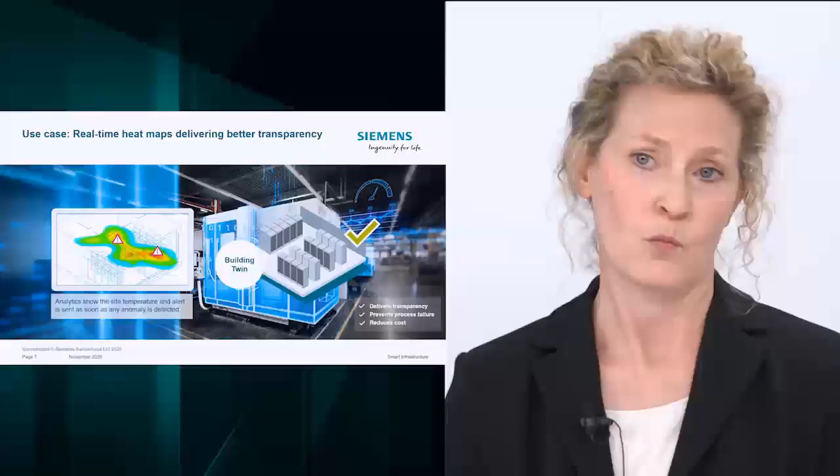Another example is from a data center. Overheating of racks is a very critical issue in data centers, and the earlier this overheating is detected, the more damage can be prevented.

If we provide real-time heat maps where the hotspots can immediately be detected, the people in charge are enabled to react immediately. By this visualization in a heat map, they can not only see the hotspots immediately, but they can also see by this temperature gradient if the surrounding areas are affected too.

Surely I can tell you many more use cases, but the point I would like to make here is that visualization is a key element that our customers are asking for. This is exactly what we did together with Bentley in a hackathon.

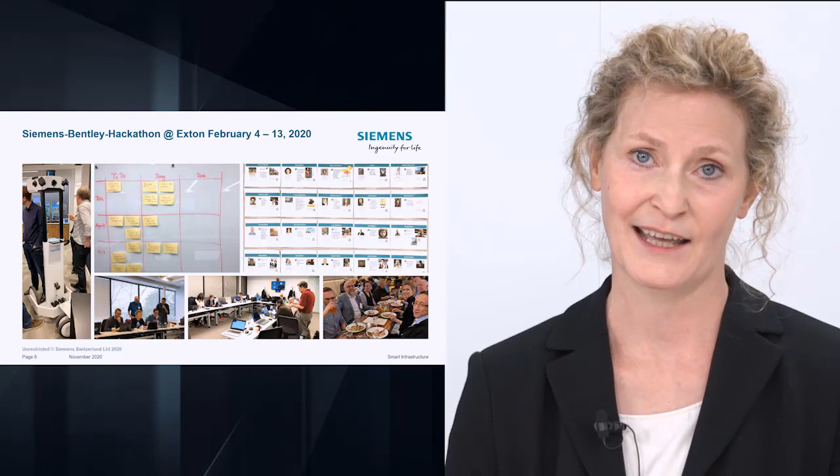We explored how we could bring an iModel together with IoT data and how we can provide an outstanding visualization. We took the iModel to deliver the structural data, and we brought it together with IoT data from various kinds of sensors. As you can see on the images, it was quite an intense week and we had a lot of hard work.

But back to what we actually did. We started with BIM data of one of our customers' buildings, located in Vienna, Austria. He delivered 4 different Revit models to us.

In the first step, we used the iTwin synchronizer, the so-called bridge, to populate an iModel with this data. In the second step, we used iModel.js to extract building structure data from the iModel into our knowledge graph database. On the other side, the connected devices in the building deliver data to the time series database.

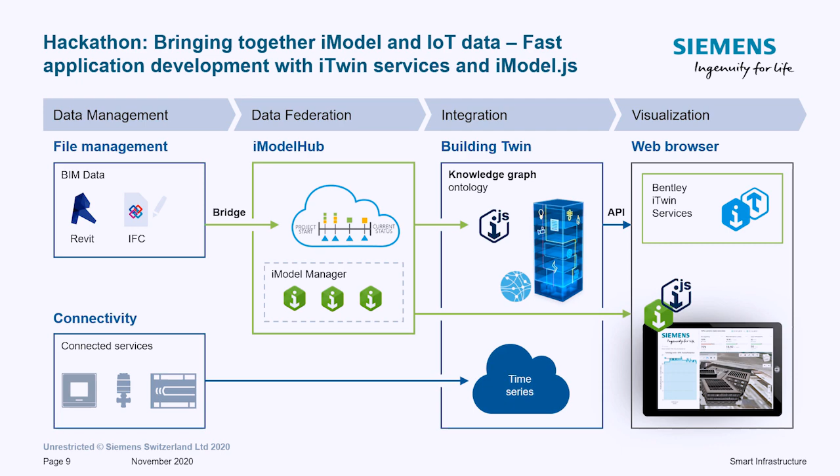These time series data can also be accessed through our building twin API. As the Revit model has unique IDs, mapping is possible with the time series data. In the hackathon, we then used different features from the iModel.js SDK and created a web application that can visualize the IoT data in the 3D model of that building.

Let's now have a look how we realized it. Sandro, the stage is yours. Awesome, thanks Berit for the great introduction and the overview.

I have just one slide left before the presentation, so please bear with me. What I want to discuss in this slide is what feature was provided from where. From Bentley we used the Synchronizer portal, the iModel hub, and also the iModel.js SDK to generate our hackathon application.

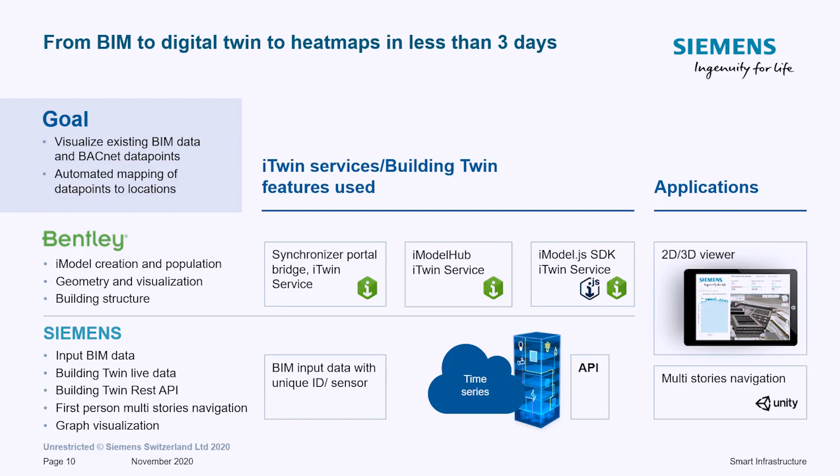From Siemens we provided the BIM data, the 4 different Revit models, also the building twin API and its data, and 2 components developed prior to and after the hackathon: the multi-story navigation and also the graph visualization.

What glues everything together is one unique ID in the physical programming of the building, and this same ID is at the same data point in our Revit models.

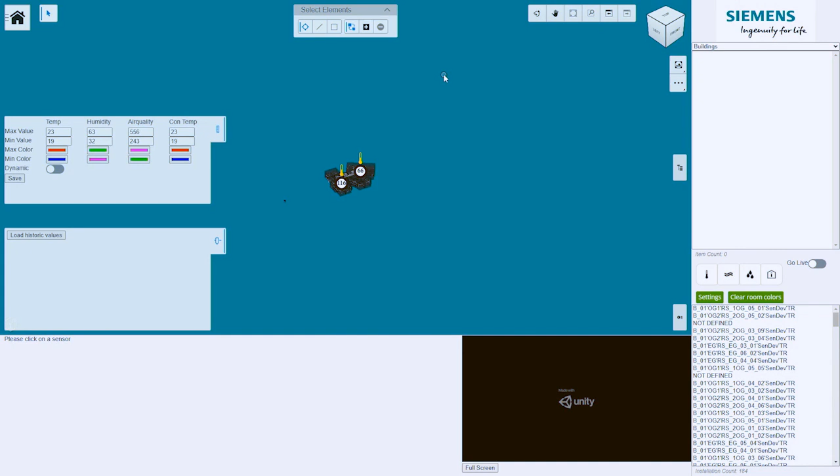With the stage now set, let's move to our demonstration. I want to first explain where this application is running. It's running on my business laptop without any dedicated graphic card, just to bear in mind the performance of what you will see.

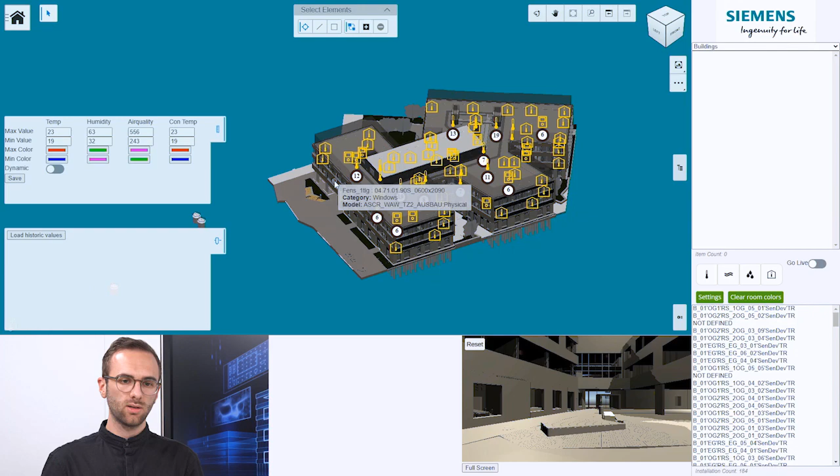This hackathon application was born out of the 9-zone example, but we did change some things. We added 2 stage panels—a functionality from iModel.js. The right-hand side is the building browser stage panel, and the lower stage panel is the sensor detail.

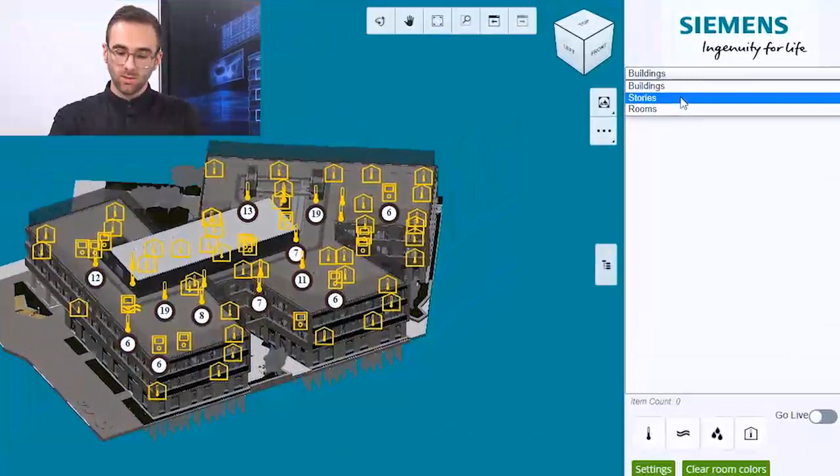I will first explain what the building browser is doing. It shows the different stories and rooms of a given building. If I click on a story, you will see each level of this building. What is interesting is the item count here shows 8 stories, but the building has only 5.

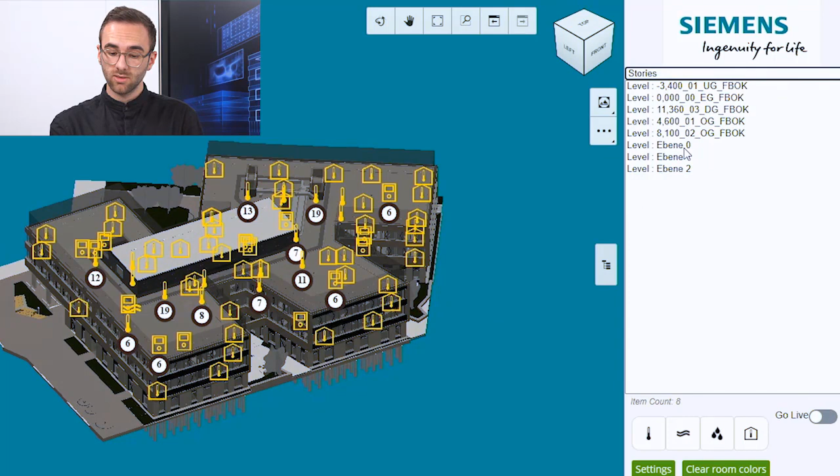This is because iModel.js aggregates everything called a floor or a story into one data table, and this is the result of it. But if we click on a certain story, you will see that our viewer creates two clipping planes, slicing the model into different stories.

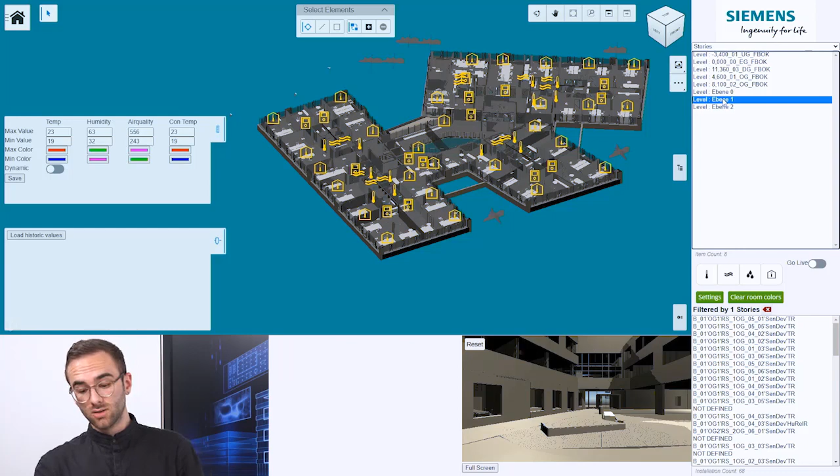Clipping planes are also a functionality of iModel.js. If we click on the different stories, not only the different stories are displayed, but also the list here of all our data points, unique IDs, is filtered accordingly.

What is also being filtered accordingly is this room list. So if we click on a certain room here and zoom into it, you will see a slight blue highlighting of this room.

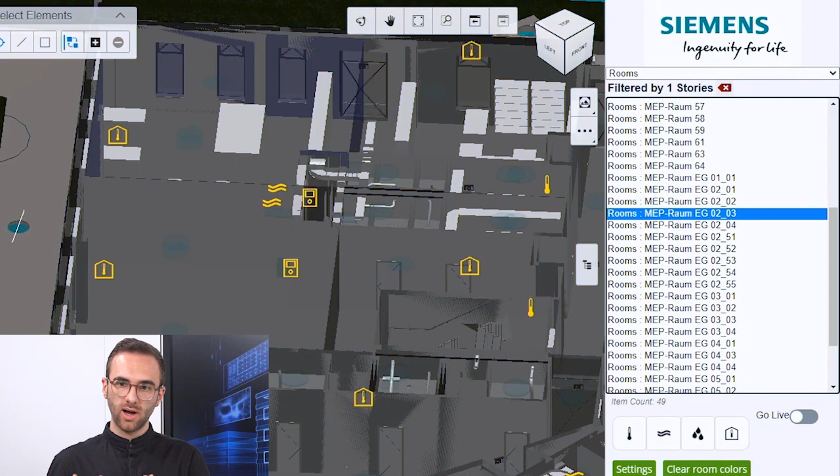But to enhance and even more highlight this room, you can click on a certain sensor, which is now a multi-sensor reading temperature and humidity. If we select every sensor, only these will be shown. This functionality of markers is also provided from iModel.js.

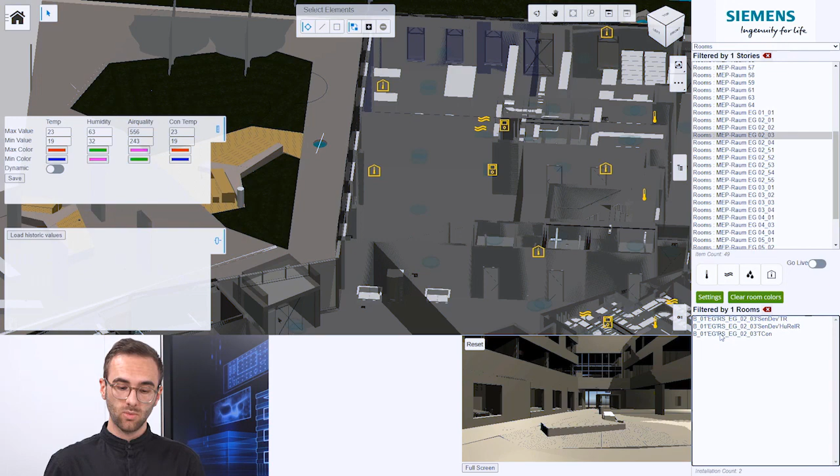And with that being explained, we now move to the two zones over here. I will first hit the loading button because it takes some time to load the last 24 hours of sensor data for this building. What this upper zone does is it generates a gradient which allows us to calculate the color for the different room sensor data.

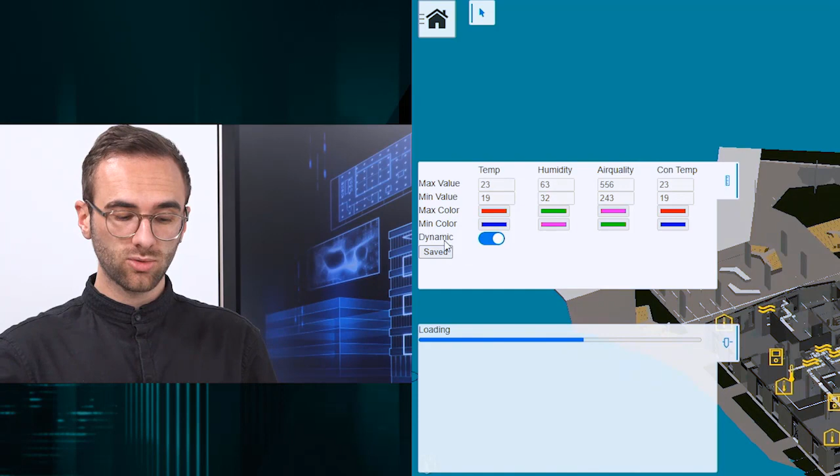We set it now to dynamic to calculate the min and max value according to the min and max of the whole data from this given sensor type, which is now the room temperature.

And now if we tilt this view a bit and move this into better view, you will have a better overview of this story. And if we hit play, what now is being shown is an animation of this floor, also coloring changingly in an hourly mode.

And if we click now on a different sensor type, let's say concrete temperature, only this information will be shown in this map.

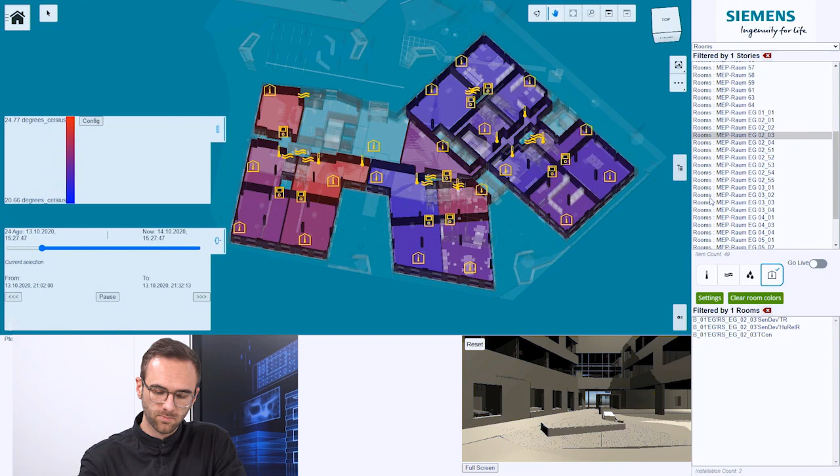What is also available is we can click on this sensor icon and only the CO2 will be shown for each room that has that information.

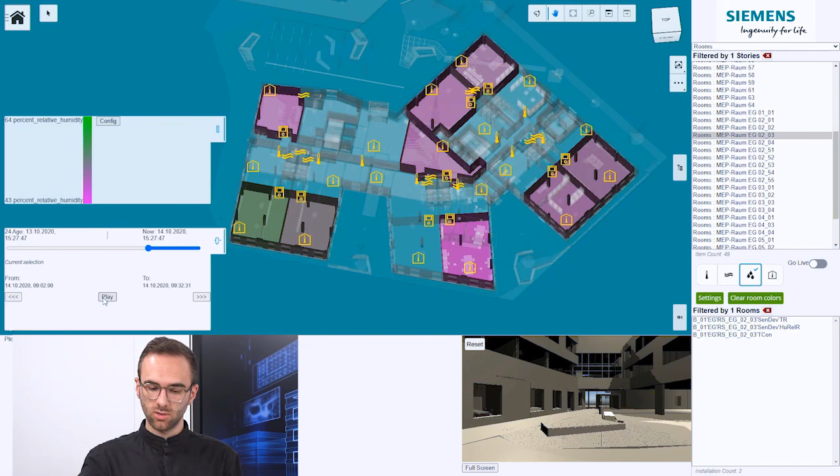It's also possible to read out the humidity of each room and color the rooms accordingly. But with humidity we always have one reading which is rather high.

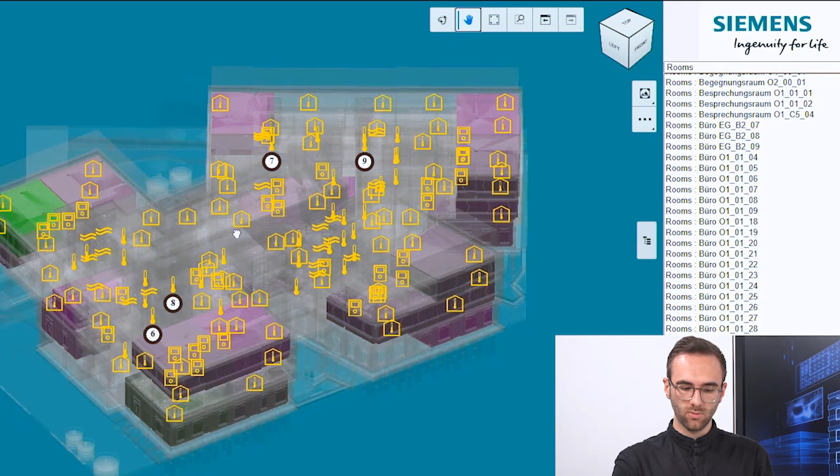To find that, we just delete the filtering to get a better overview of this whole building. And if we move that and rotate the building, we will see the exact room which is now reporting this high reading.

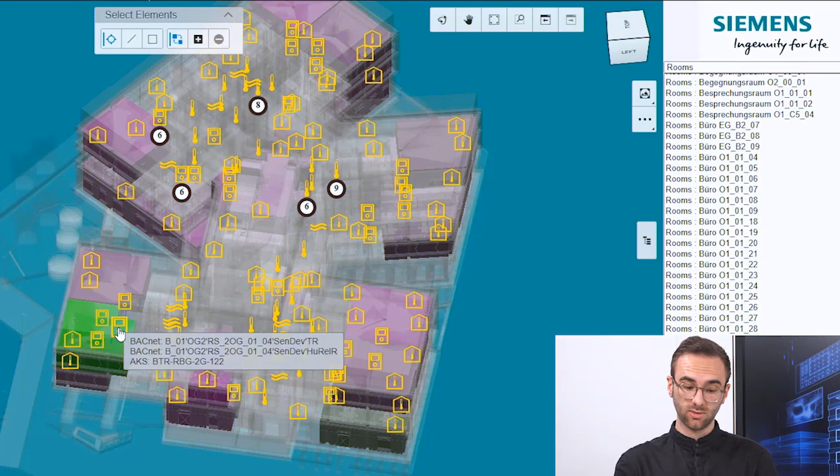What I can do now is hit on this marker of this sensor which is sending this rather high humidity.

These two applications in the sensor detail page come to life. On the right hand side you will get an exact path visualization of how to reach this sensor. It will take the stairs and the correct doors accordingly.

On the left hand side you will see a graph visualization provided from D3 of the last 24 hours of data from this sensor. That allows you to zoom in and look at a specific time when the value is being received.

How these three applications work is through a JavaScript interface. So the iModel.js application gives our unique ID, the BACnet ID, to each application. And these applications know what to do with the received BACnet ID, either showing the data from the last 24 hours or showing the path there.

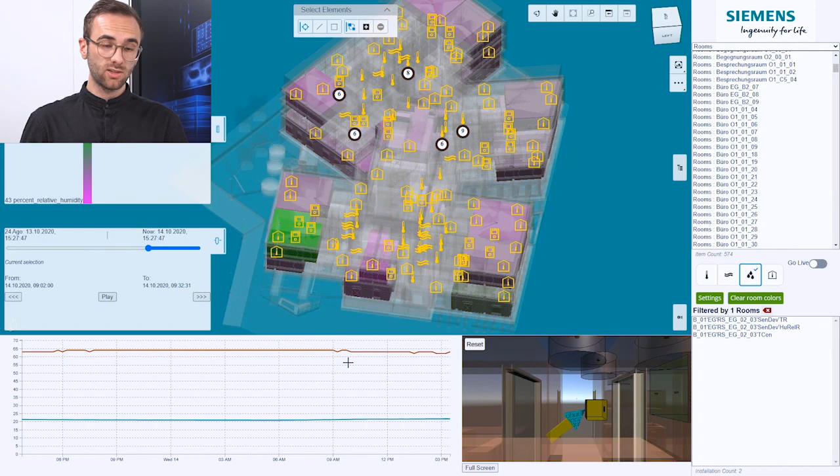This allows for a borderless application that integrates three things into one, to have one easy to use application for all your needs. This concludes our demonstration, and now we'll head back to the slides.

We want to thank Bentley for the great support provided during and after the hackathon. From my personal experience as a software developer, iModel.js was easy to learn, it had great possibilities, and especially for me, the open source aspect and the open development environment was just awesome.

So you can reuse the application that you already programmed into these iModel applications, so you don't have to rewrite everything from scratch. But surely there are still some things to improve.

So a better overview of how to find features, because there are so many, more detailed documentation with implementations, and something more personally, better responsiveness and performance improvements on mid-tier devices like my laptop.

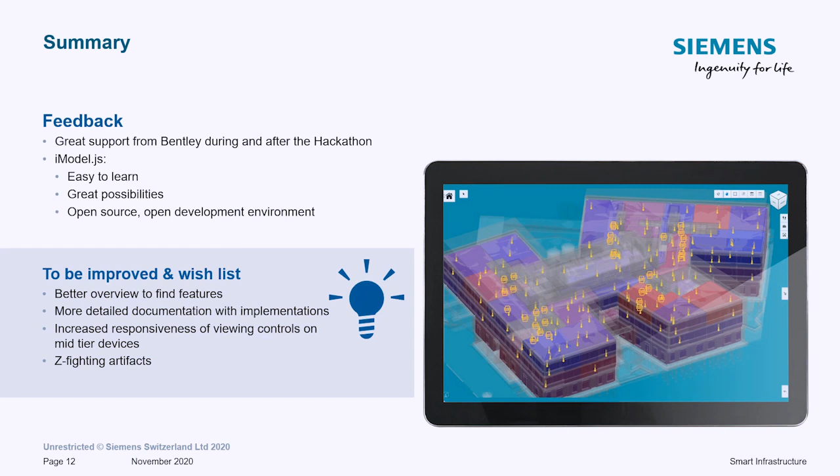Also, we have some z-fighting artifacts in our application. These occur when two areas are flush to each other and the drawing program doesn't really know which plane is closer to the camera. It would be nice to have something like a developer guide on how to mitigate those artifacts in iModel.js.